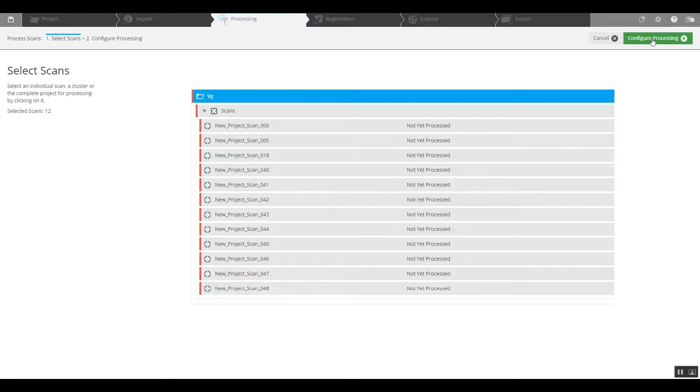So what we can do is we start at the top folder and we can go to Configure Processing. And as we see here, we've got options for targets, which we did not use. We can colorize scans, create a scan point cloud, which we don't want to do, and we skip fully processed scans. Now to start with, many times you don't want to colorize the scans right away.

Depending on if you're outside, maybe you had a lot of direct sunlight, you can get a lot of washout from the photographs and you can't see a lot of the data that you've collected with the laser. That's one reason to not colorize the scans until afterwards. On the other hand, interior scans, because of the lack of light, you can have shadowing that can restrict your being able to see data as well. So there are a lot of reasons to not add color until it's all put together, but today we will colorize our scans during this process.

At the bottom here, we can perform automatic registration. Here's our option. We take that option and it will tell us what registration method we are using. Here's our options: target based, which again, we're not using targets; top view, cloud to cloud, or both top view and cloud to cloud, which is what we will do.

This is defined as basically the software looks down on each scan and looks for geometry, whether it's walls, furniture, equipment, and then takes scan number 1 and scan number 2 and starts to overlap them, looking for common geometry. Once that is put together, it will run a cloud to cloud looking for common XYZ points in space, and that will tighten up the registration. So we're going to go ahead and stick with top view and cloud to cloud and start processing.

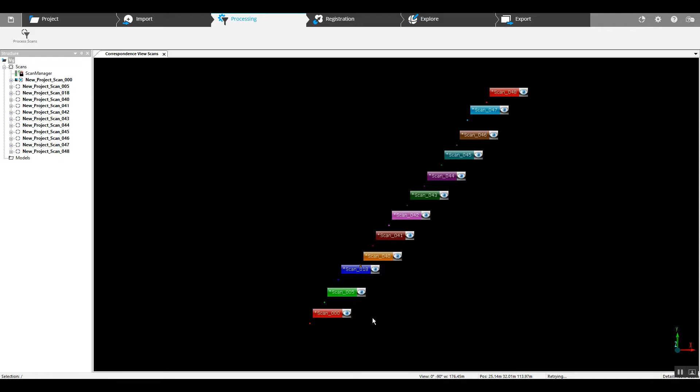As we can see, our pre-processing was successful. We've got a green light. We can right-click and lock that group of scans. And if we want to take a look at them, we will go ahead and click a correspondence view. It's going to have us say yes to loading all of the scans. Our basic positioning leads us to believe that this is going to be exactly where they should be. They're in a line, and in a minute or two you'll see all of the scans load and we can see everything in 3D.

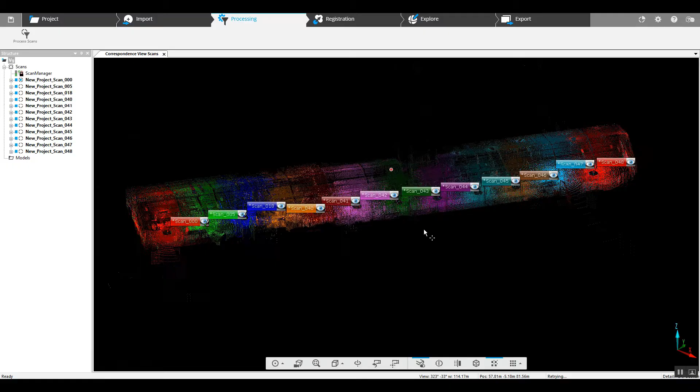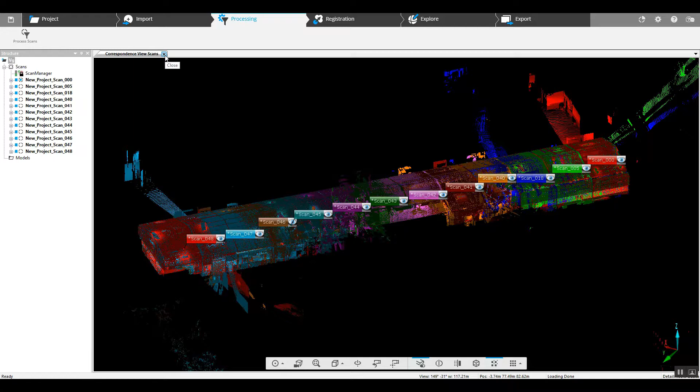Now everything is loaded. We drop a center point, and it looks as though everything's come together beautifully. The software here from Faro does a very good job, especially with indoor scans like this. There's lots of geometry to go off of for the scans to be put together. The next thing that we can do is create a project point cloud.

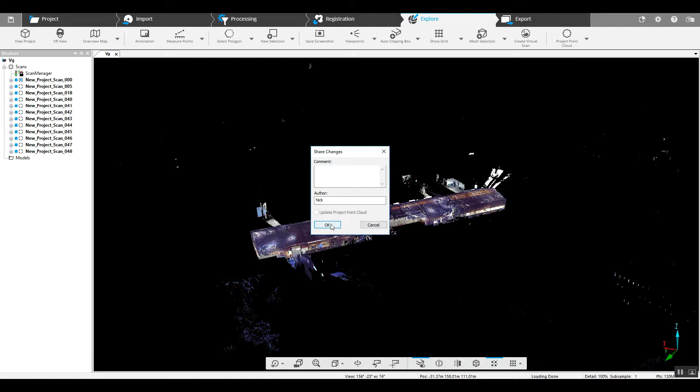Simply go into our Explore option, and we've got a project point cloud option on the top right. We can create it. What this will do is it allows us to open up everything in 3D just like this, but without actually loading the scans on the left. It makes the computer work faster, and there's less stress on the computer because there's no need to have all of these loaded and the point clouds basically on your desktop.

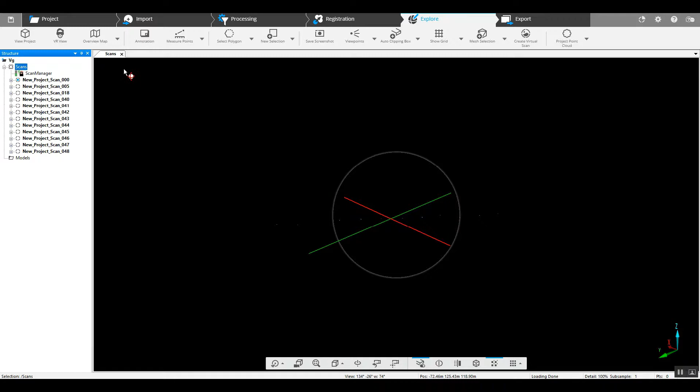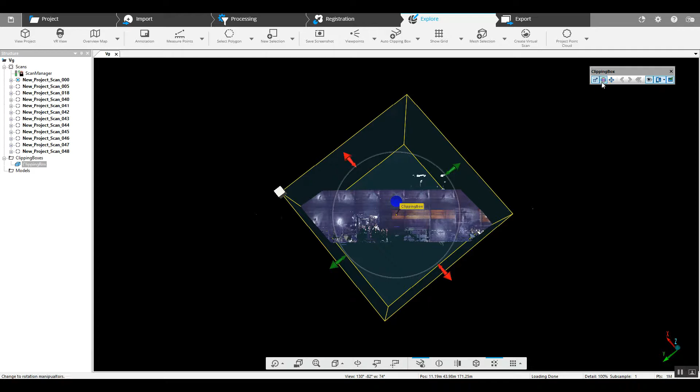With our point cloud created, we can quickly jump into a view screen, unload all of the scans, and now we've got the exact same view. Nothing's loaded over here, and it's much less of a stress on the computer. It also enables us to create a quick clip box, and we can just align that box here real quickly with our walls.

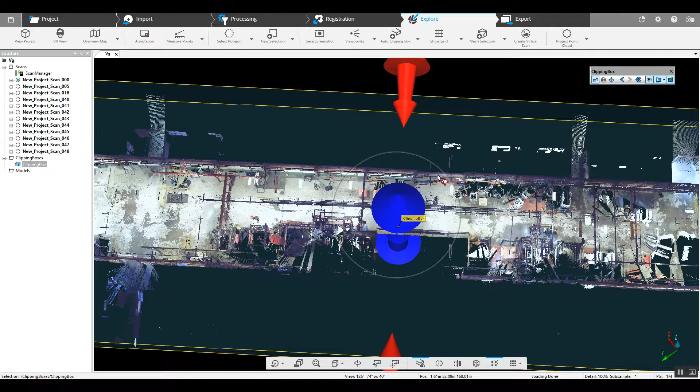In this case, we want to see some of the things inside of this building, so we can just bring that clip box down, take a look inside, and at this point we can just make the clip box invisible, and with our measuring tool we can measure between anything on the project in 3D this way.

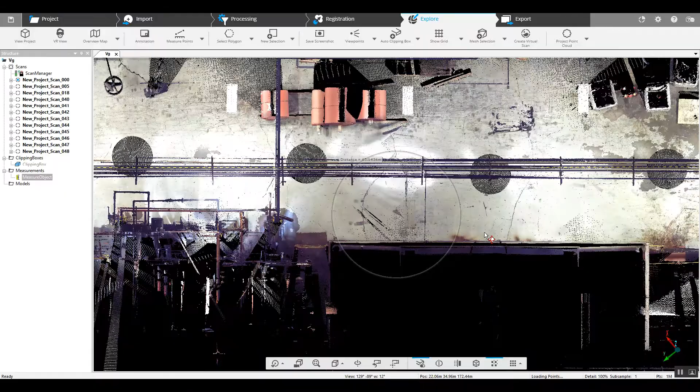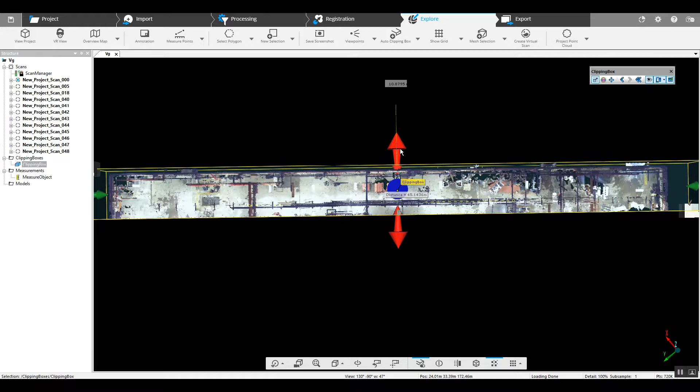If there's something specific that we want to get to, say this line in the middle, we'll just bring our clip box back and eliminate a lot of the data here that clutters things up. Now we've got a much clearer view of what is important to us in this case: some of the lines here running across the ceiling, the beams, and the distance between the vertical beams.

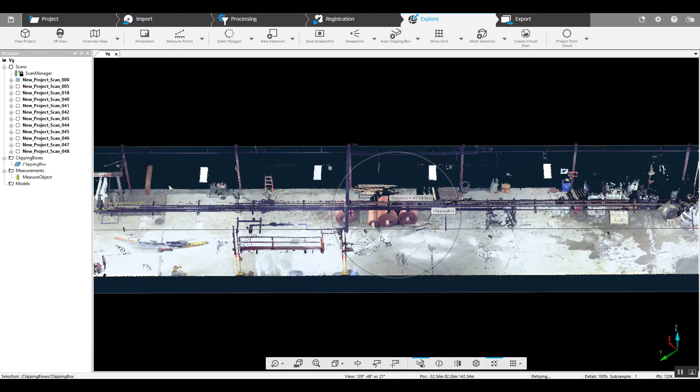Now, if we'd like to take this project and export it and use this data in AutoCAD or ReCap or any number of different programs, we can just simply move into our Export tab. And here we're going to export our scans with ReCap. Here's our export project. Click on this.

It will be a SCENE project to ReCap project, and then we export. That's simple. What we'll end up with is a group of RCS and RCP files. Those files can be pulled directly into everything from 3ds Max, Maya, AutoCAD, ReCap, any number of things.